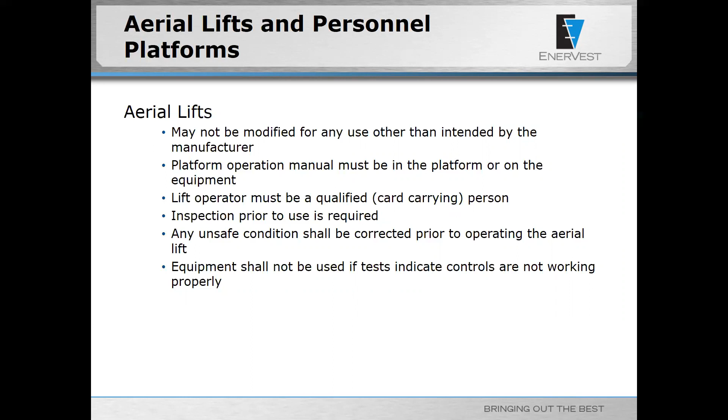Contractors shall conduct themselves in a manner that respects the rights of the surrounding community. Community relations are critical to EnerVest success. The contractor and EnerVest, where appropriate, shall work together to support this activity. All such activities shall be coordinated through the designated EnerVest representative. Contractors are not to represent themselves as speaking on behalf of EnerVest.

Confined space entry is defined as an area that is not designated for continuous human occupancy, that has a limited means of ingress or egress, or presents a toxic environment.

Contractors should provide advance notice of all confined space entries. Prior to entering confined space, steps should be taken to minimize atmospheric hazards. Atmospheric testing must be conducted continuously while in a confined space. Prior to entering confined space, a confined space permit must be completed, and all individuals participating in the confined space must be trained on their required duties prior to entering.

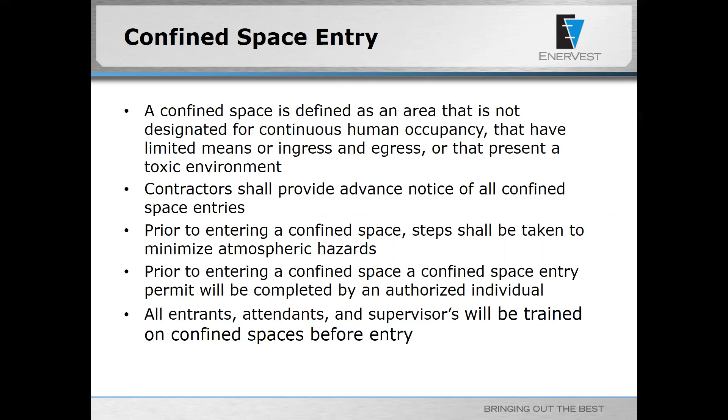Drugs and alcohol are not permitted. The use, distribution, or being under the influence of illegal drugs while on EnerVest property is prohibited. It is each person's responsibility to notify his or her supervisor when taking any medication or substance that may adversely affect his or her ability to work. EnerVest reserves the right to search vehicles and equipment for prohibited items.

Electrical safety: only qualified and authorized persons shall work on electrical equipment and devices. All electrical equipment shall be properly grounded and in good working condition. Electrical equipment shall be de-energized prior to performing work on the equipment. All installations shall conform to applicable electrical safety standards, electrical codes, and industry standards.

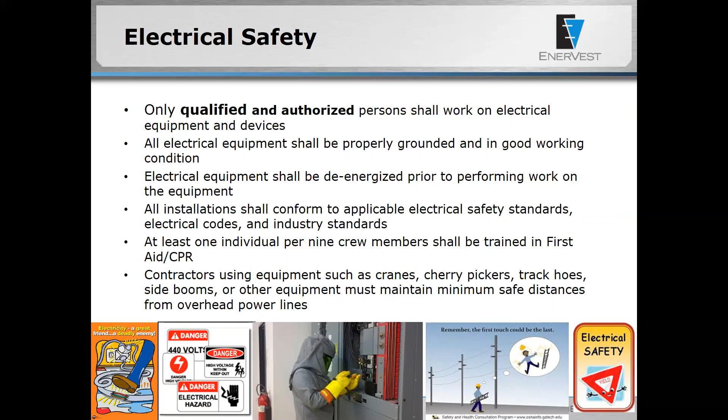At least one individual per 9 crew members shall be trained on first aid or CPR, and contractors using equipment such as cranes, cherry pickers, trackhoes, side booms, or any other equipment must maintain the minimum safe distance from overhead power lines, which is 10 feet for 0 to 50,000 volts. Over 50,000 volts, you add 4 inches for every 10,000 volts over 50,000.

EnerVest has both corporate and site-specific emergency response procedures for handling emergencies which could occur on the job site. EnerVest will provide awareness of emergency response procedures for contractors as required. All contractors should learn and follow emergency response procedures, and where appropriate, may be required to develop an emergency response plan.

Environmental protection is extremely important. You must comply with all applicable regulations related to the protection or conservation of the air, land, water, or other aspects of the environment. Immediately report any spill, discharge, release, or migration of any substance or any quantity to an EnerVest representative. Trash and waste may not be left on location and shall be placed in appropriate labeled and covered containers. Disposal of contractor-generated waste is the responsibility of the contractor and shall be done in compliance with all applicable regulations.

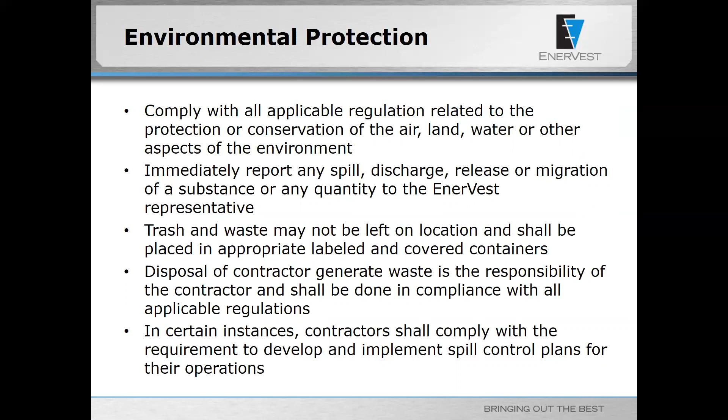In certain instances, contractors shall comply with the requirement to develop and implement spill control plans for their operations. Excavation and trenching.

Before initiating any excavation, trenching, or earth disturbance using mechanized equipment, a ground disturbance checklist or work permit must be completed or obtained from the EnerVest representative.

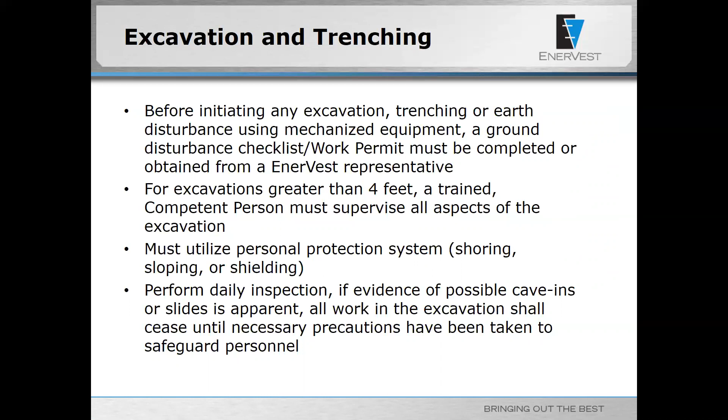Where excavation is greater than 4 feet, a trained, competent person must supervise all aspects of the excavation. They must utilize personal protection systems such as sloping, shoring, or shielding. Daily inspection must be performed, and if evidence of possible cave-ins or slides is apparent, all work in the excavation shall cease until necessary precautions have been taken to safeguard personnel.

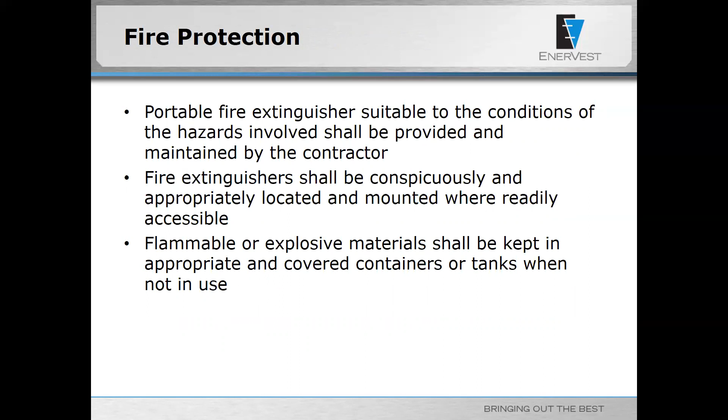Fire protection. Portable fire extinguishers suitable to the conditions of the hazards involved shall be provided and maintained by the contractor. Fire extinguishers shall be conspicuously and appropriately located and mounted where readily accessible. Flammable or explosive materials should be kept in appropriate and covered containers or tanks when not in use.

Hot work. Any and all hot work will require a hot work permit to be completed. Ensure that fire extinguishers are in the work area where any hot work is to be performed. LEL levels must be below 10% before any hot work can be conducted, and a fire watch must remain at site at least 30 minutes after hot work has been completed.

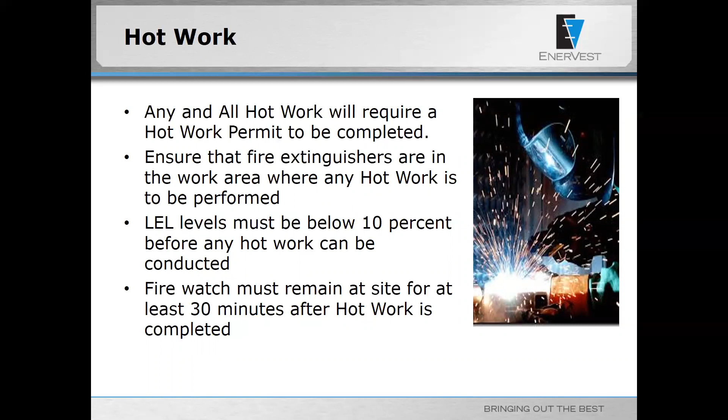Forklifts, backhoes, and other off-highway equipment - only trained and authorized operators shall be permitted to operate powered forklifts, backhoes, loaders, excavators, or other heavy equipment. Brakes of highway trucks shall be set and wheel chocks placed under the rear wheels while parked.

Forklifts, backhoes, and other off-highway equipment should be equipped with backup alarm devices, and if at any time the equipment is found in need of repair, defective, or in any way unsafe, the equipment should be taken out of service until it's been restored to safe operating condition.

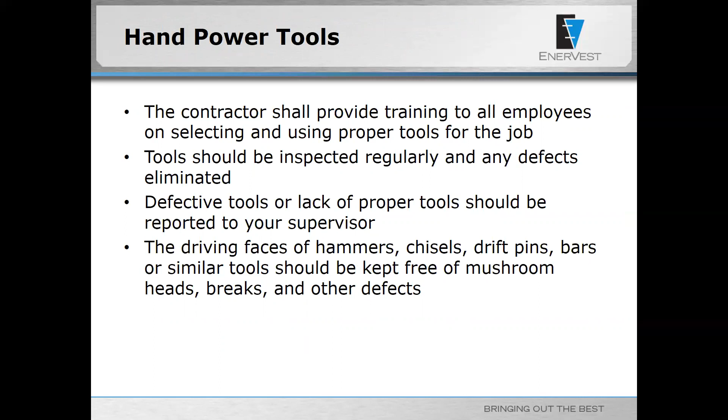Same thing for hand power tools. Contractors should provide training to all employees on selecting and using proper tools for the job. Your tools should be inspected regularly and any defects eliminated. Defective tools or lack of proper tools should be reported to your supervisor. You want to pay special attention to driving faces of hammers, chisels, drift pins, bars, or other similar tools to be kept free of mushroom heads, breaks, and any other defects.

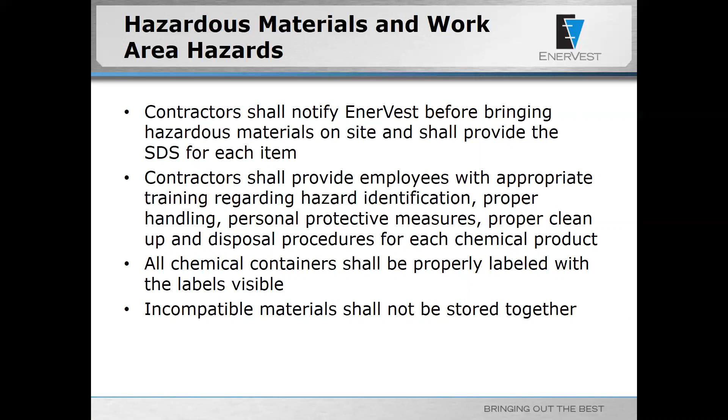Hazardous materials and work area hazards. Contractors shall notify EnerVest before bringing hazard materials on site and shall provide the SDS for each item. Contractors should provide employees with appropriate training regarding hazard identification, proper handling, personal protective measures, proper cleanup, and disposal procedures for each chemical product. All chemical containers should be properly labeled with the labels visible, and incompatible materials shall not be stored together. All this information can be found on SDSs, and if you're using a chemical, please review the SDS prior to use.

Housekeeping. Materials should be stored only in designated areas and in properly labeled containers. Areas should be clear around safety-related equipment. Tools, fixtures, and other equipment shall be maintained in good condition and kept in the proper place when not in use. At the end of each workday or when the job is complete, the work area shall be left in a clean and orderly condition.

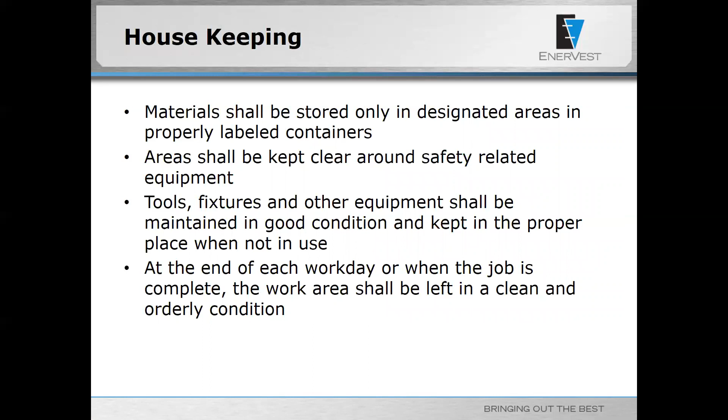Hydrogen sulfide, H2S. Hydrogen sulfide is a colorless gas with an offensive odor at certain concentrations. In higher concentrations, it cannot be smelled. Any work areas where H2S may be present will be identified. You must have a 4-gas meter, and if a 4-gas meter alerts the presence of H2S, immediately evacuate the area, upwind, crosswind, uphill, and notify your supervisor.

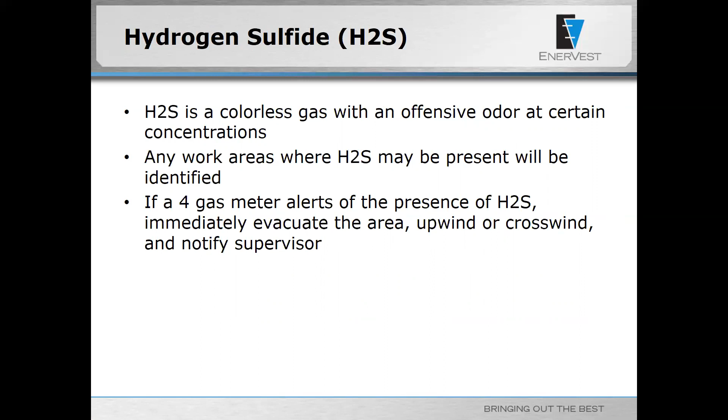Inspections and audits. Contractors shall periodically conduct HSE inspections and audits of their operations, equipment, and work areas as recommended by industry standards. Contractor management shall review audit findings and corrective action plans with EnerVest representatives when requested.

Lockout tagout. Only trained and authorized employees may conduct lockout tagout. A lockout tagout permit must be filled out, and all affected employees must sign on and off the lockout tagout permit. Lockout tagout equipment will not be used for any other use, and must notify all affected employees upon application and removal of lockout tagout equipment.

Lifting and rigging. Only trained and authorized employees are permitted to operate lifting devices or perform rigging operations. Only authorized lifting equipment is permitted. Makeshift and fabricated lifting equipment is prohibited, and taglines shall be used to guide or stabilize suspended loads.

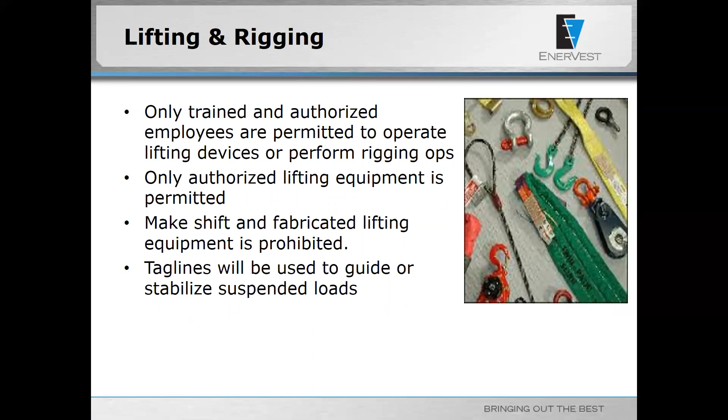Equipment inspections must be happening. Booms, cables, rigging control devices, and safety devices will be inspected for proper operation. Load hooks with more than 15% deformation of the normal throat opening must be removed from service. Damaged slings should be cut up prior to disposal, and do not walk or stand under suspended loads.

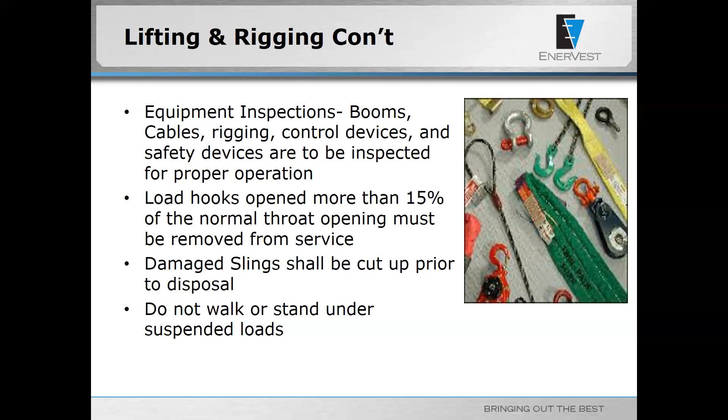Motor vehicles. All drivers and vehicles shall be selected, equipped, and maintained for the applicable driving conditions. The driver shall have a valid license appropriate for the vehicle being driven. The driver shall observe all posted signs and traffic laws. The use of cell phones and two-way radios while driving is strongly discouraged.

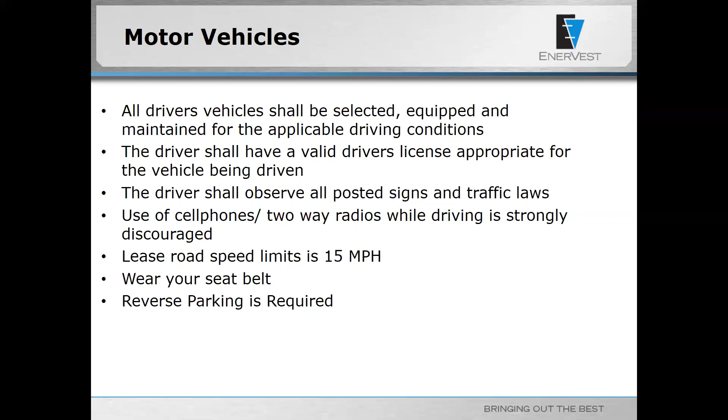Lease road speed limit is 15 miles an hour. And always, always, always wear your seatbelt. Reverse parking or pull-through forward parking is required, and we operate on CB Channel 5. Effective communication is extremely important to maintain safety.

NORM, naturally occurring radioactive materials. Naturally occurring radioactive material is a low specific activity material that exists naturally in the environment. Solid NORM is typically found in the form of scale and sludge. Gaseous forms of NORM are found in some natural gas production streams.

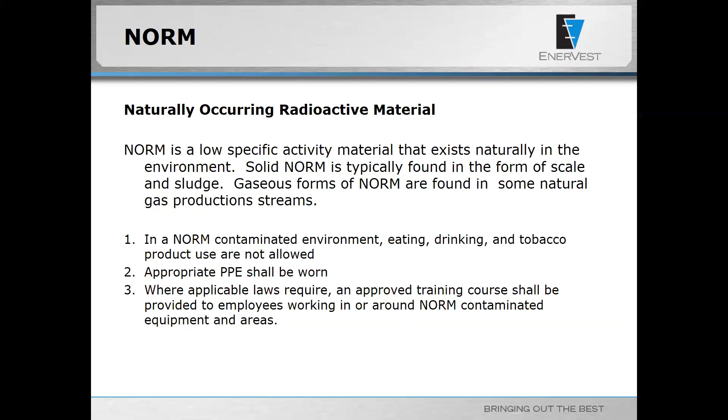In a NORM-contaminated environment, eating, drinking, and tobacco products are not allowed. Appropriate PPE shall be worn, and where applicable laws require, an approved training course shall be provided to employees working in or around NORM-contaminated equipment and areas.

Personal protective equipment. All general PPE must be worn, that is, FR clothing for your outermost layer, hard hats, safety toe boots, gloves, and eye protection.

Depending on the hazard, additional PPE may be required. If you're working at heights over 4 feet and there's no handrail present, fall protection must be used. Of course, when working with chemicals, wear the appropriate chemical protective equipment, and when working around noises over 85 decibels, wear hearing protection.

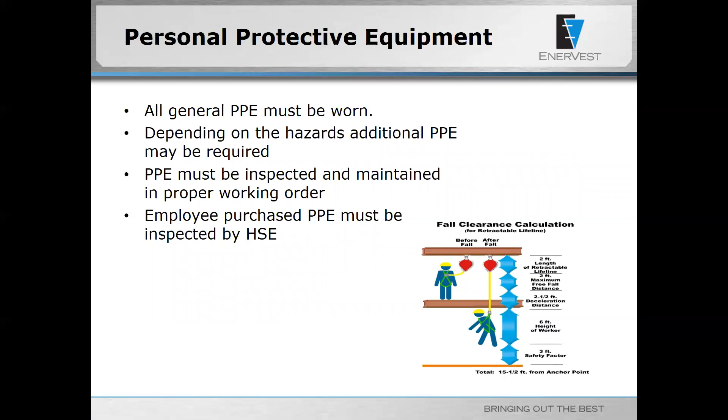Scaffolding and ladders. Scaffolding shall be designed by a qualified person and shall be constructed and loaded in accordance with safety standards. The competent person shall affix a tag to the scaffolding stating that it has been erected correctly and inspected. The ladder shall be checked visually prior to use, and shall also be inspected following any occurrence which may cause damage to the ladder.

Do not use defective ladders. Any ladder having damage affecting its safety shall immediately have a warning sign affixed to it with the word danger, do not use.

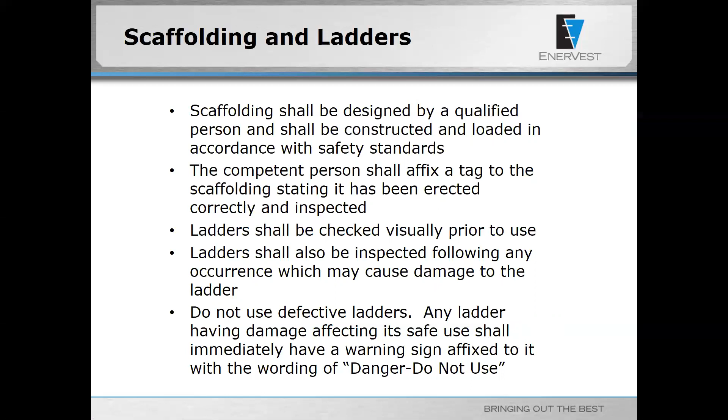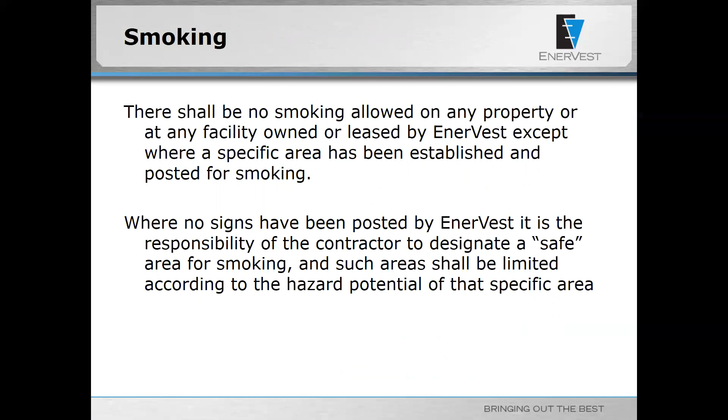There shall not be any smoking allowed on property or any facility owned or leased by EnerVest, except where specific areas have been established and posted for smoking. Where no signs have been posted by EnerVest, it is the responsibility of the contractor to designate a safe area for smoking, and such areas should be limited according to the hazard potential of that specific area.

Violence in the workplace is not permitted. It is one of the company's key objectives to provide a workplace environment free from violence, threats, harassment, coercion, and intimidation for all personnel, employees, contractors, and vendors.

Acts of workplace violence will not be tolerated by the company. Any contractor found to have violated this policy will be subject to immediate removal from company property and/or prosecution if warranted.

Your job hazard safety analysis. Prior to commencing work for the day or any task, a job hazard safety analysis must be conducted. This should cover your procedures, your equipment and tools, your PPE, and the positions of people.

It must be redone if work changes or environmental changes happen. At a minimum, go over your equipment status, equipment locations, personnel locations, what hazards are present, and how you're going to mitigate those hazards. Make sure everybody signs on and off the JSA.

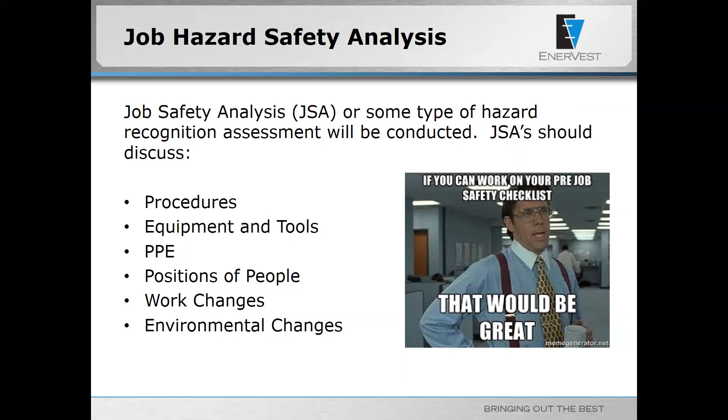John Lawson is the Senior HSE Specialist and handles the environmental work for Virginia. Please contact us if you ever need to get a hold of us.